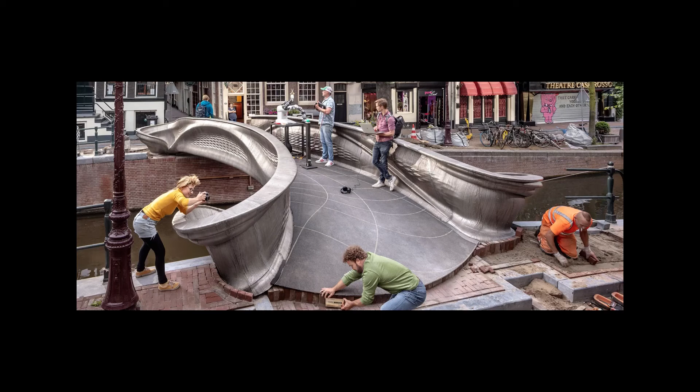So the bridge in question is called the MX3D bridge. It's in Amsterdam. I'm going to talk about our role in the project, and in particular some testing of material, components and the full bridge, and simulating it. And also what I think the future looks like to some extent in this area.

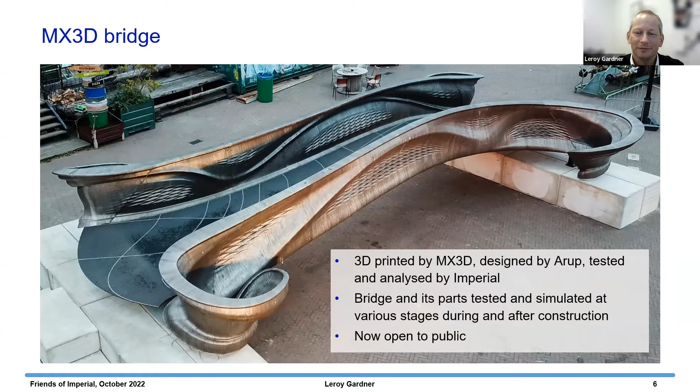So it's a footbridge, 10.5 meters span and 2.5 meters wide. There's about 4.6 tons of printed material—stainless steel—and then an additional 3 tons for the deck, finishes and end beam. These are essentially non-structural elements.

The printing took about 12 weeks in total print time, spread over a 6-month period. Printing wasn't done at full speed because there was a bit of learning and checking as the process was going on. It's a tubular structure, so all of the components are hollow, with 2 main thicknesses: 3.5 millimeters and 8 millimeters.

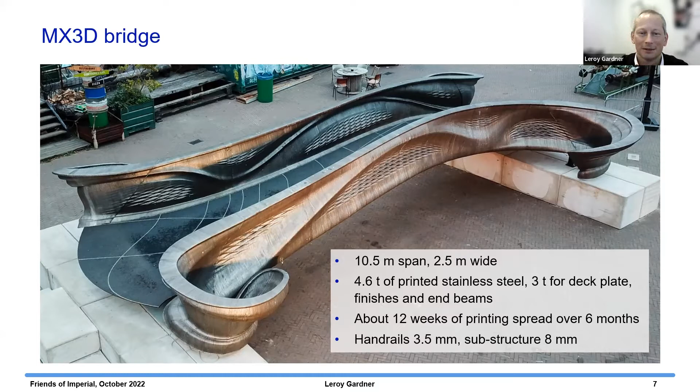The process used to print the bridge has a nice acronym called WAAM, which stands for Wire Arc Additive Manufacturing. It's basically an adapted welding process—like a welding torch controlled by a robotic arm, following the shape prescribed by a digital model. So the technology is to some extent quite familiar already to industry; we've been welding things for a long time. And the hardware, 6-axis robotic arms, are not particularly expensive, and they're used in a wide range of industries.

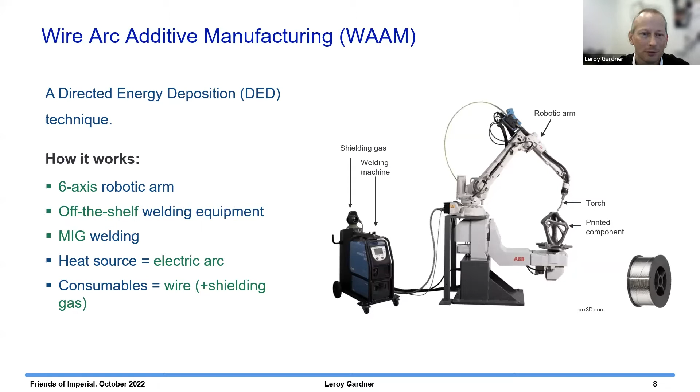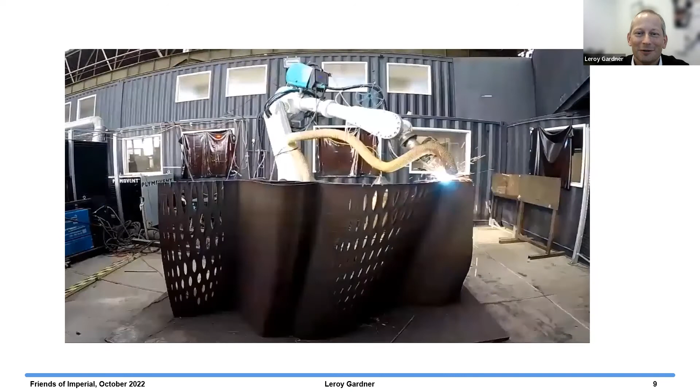The actual material used for the printing is wire—again, just standard weld wire. I've got here a short video showing an element being printed, and you can see the robot moving layer by layer, printing the structure up vertically. The bridge was built in 4 pieces, each 2.5 meters in length, and then they were manually welded together to make the full span.

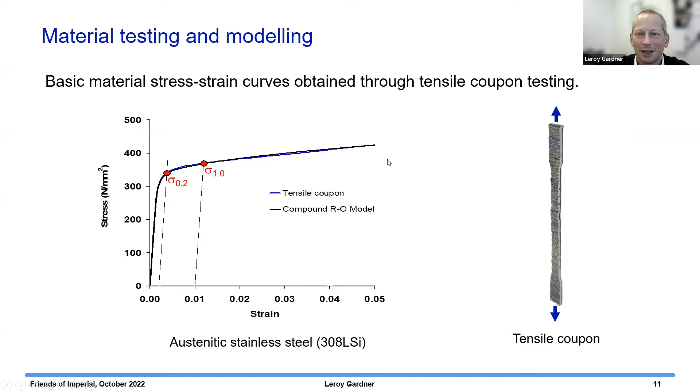So material testing: the first thing we wanted to know was the underlying mechanical characteristics of this material. You normally obtain these by doing what are called coupon tests—you can see one on the screen. We put the material in tension, get the load and extension, and convert that into a stress-strain curve. This characterizes the material response.

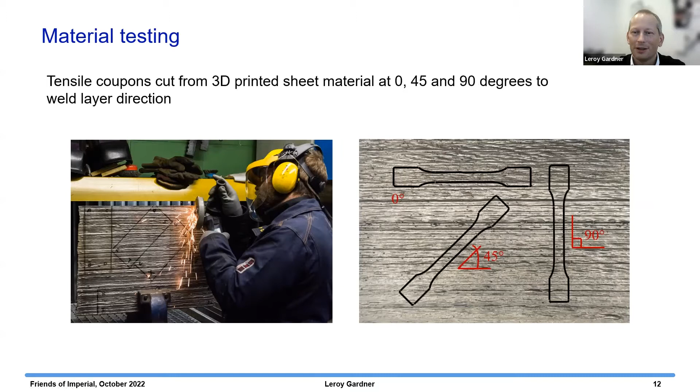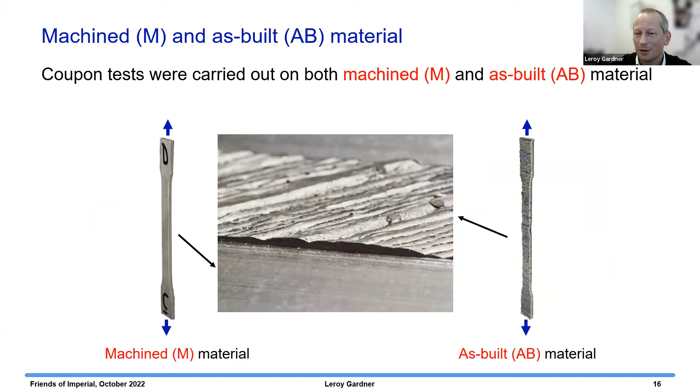Now, this is a layered material, so we thought there's likely to be an influence of direction of testing. We cut out coupons at different angles to the print layer direction. We also thought the surface finish would have an influence on behavior, so we milled down some coupons to get them flat. We conducted separate tests—some on machined material to get the underlying material characteristics, and some where the surface roughness was left in place to get the as-built characteristics. The bridge itself was not machined in any way after it was printed; it was left in the as-built state.

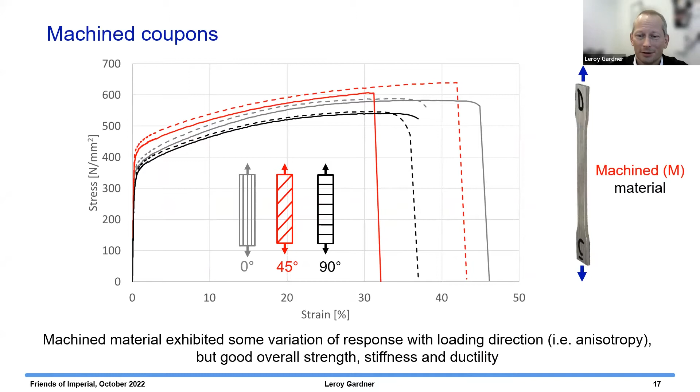So here are some typical stress-strain curves, showing results for coupons in the 0, 45 and 90 degree directions. Generally the mechanical properties were good, with some degree of anisotropy—different characteristics in different directions—but overall good strength, stiffness and ductility.

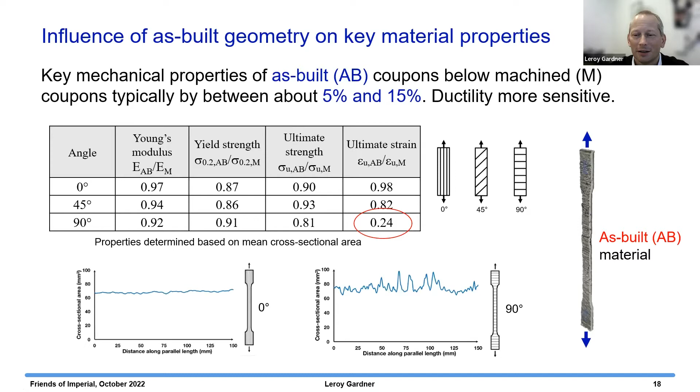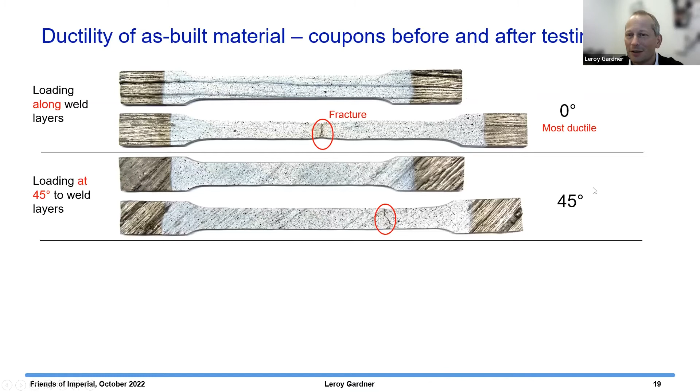45 degrees, it's a bit less ductile. And then 90 degrees, it's quite a lot less ductile. The reason for that is in the 90 degree direction, you've got your cross-sectional area going up and down, and all of the deformation tends to run into the minimum cross-section. So the strains become much more localized, and therefore you get less ductility over the full length of the coupon. So that's logical.

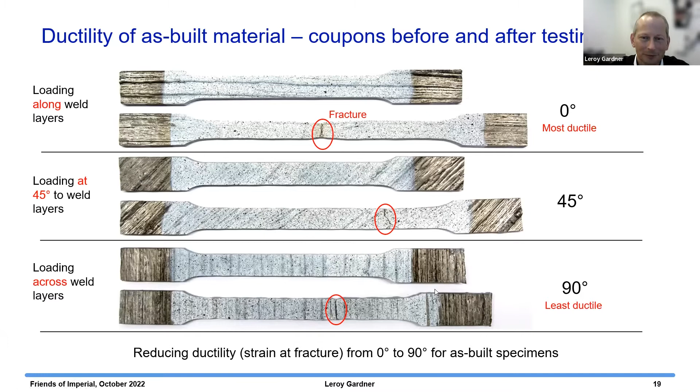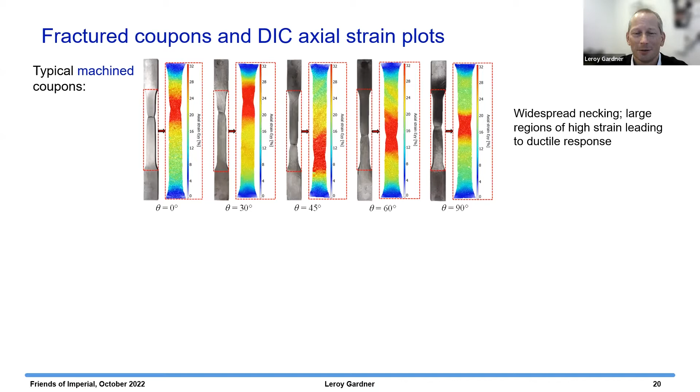But what these are showing you, the first set of diagrams here are for the machined coupons at different angles - we've got a couple of intermediate angles that we looked at as well. And the red region is the region of high strain. These red regions are quite large, and that means the high strained zones are quite widespread, and that leads to a nice ductile response. And that happened in all directions, really, for the machined material.

But when you look at the as-built material, it's still true that you've got widespread zones for the lower angles. But when you get up to 90 degrees, you can see it's very much more concentrated. All of the deformation running into that minimum cross-section, and that has a negative effect on ductility.

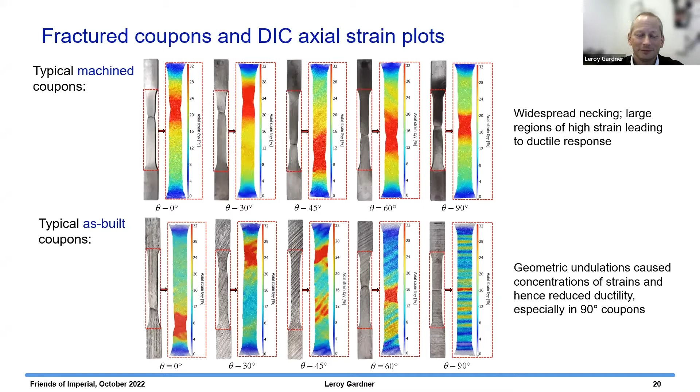And what we also found is that, as you'd expect, print quality is important, and the technology is still evolving, and print quality is getting better. Of course, the better you can print it, the lower the surface roughness, the less this sort of localization issue becomes important.

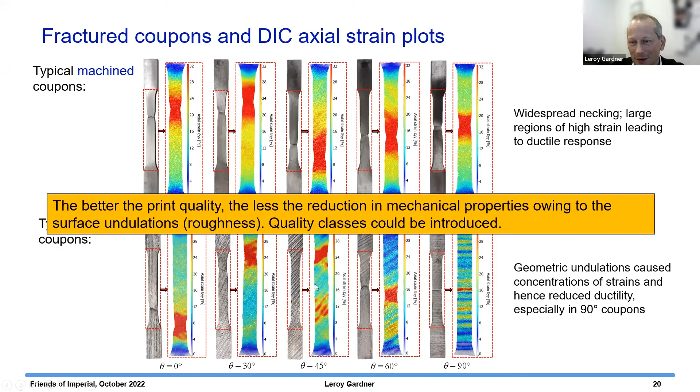Okay, so let's look at the material - so looking at some components now. We printed components of similar dimensions to some of the key parts of the bridge, and we printed regular cross sections so that we could compare their behavior to normally produced sections, and we could predict their behavior using current design codes.

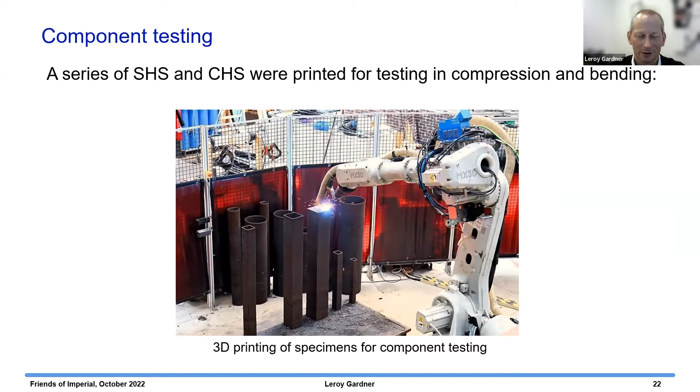A feature of this technology is that you get more geometric variability than you get with conventionally produced sections. You can see some of the surface roughness, for example, on this tube. But we really wanted to capture the geometry as accurately as we could. You can't just use a vernier, because the thickness and so on is different at all different points.

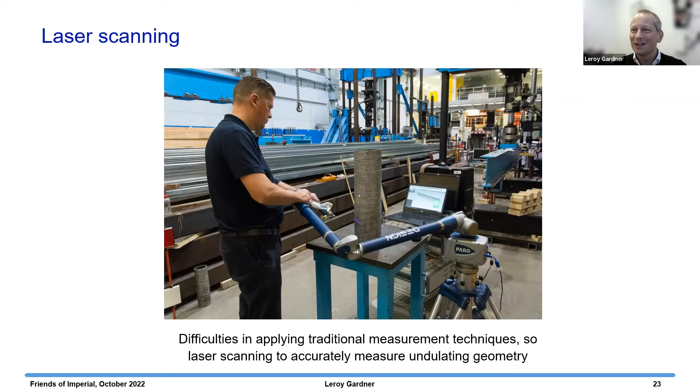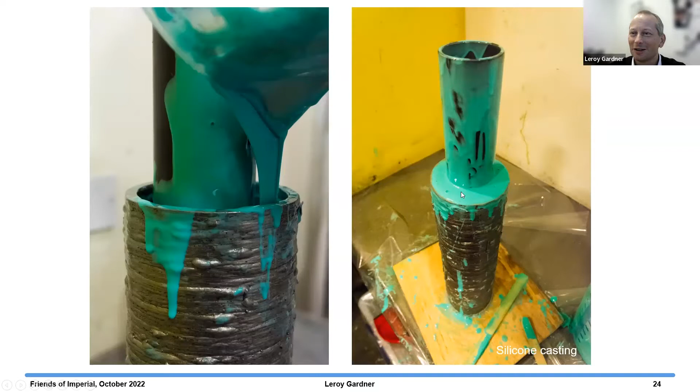So we used 3D laser scanning, and all of the sections were tubular. The problem with a tube is you can scan the outside, but it's not so easy to scan the inside. So we had the idea of trying some silicone casting of the inside - a bit messy, but we created a silicone cast, which we got a bit better at pouring it later on.

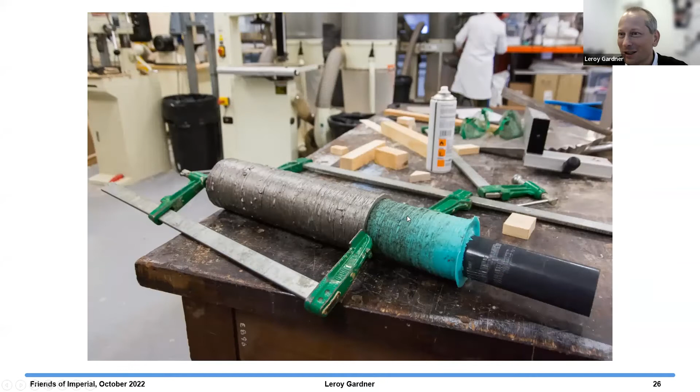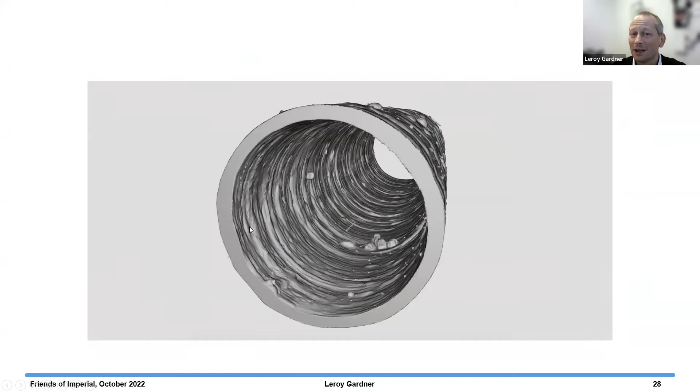And then we pulled out the silicone cast, having lubricated it and so on, and scanned the cast, and then joined the inside and outside to get a full 3D representation of the sample. At the ends of the tubes, we could actually scan both the inside and outside - it was nearer the middle that we couldn't see with the laser scanner. So we could confirm the accuracy of this idea of joining the two bits together.

And what that allows you to do is get really detailed statistical information about variation in diameter, variation in thickness. And this is important for later on when we're looking at safety, reliability, and so on.

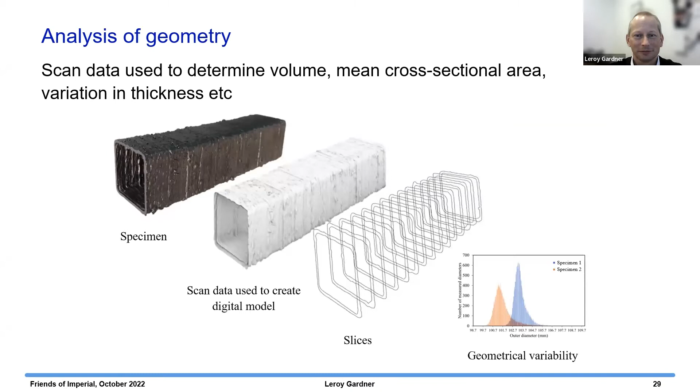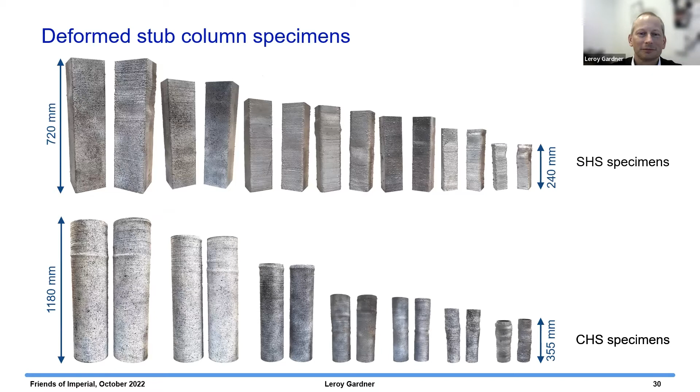So we tested a series of different geometries, different sizes, different proportions. And we typically got, so these first ones are short compression elements, and you can see the failure modes here, which is called local buckling.

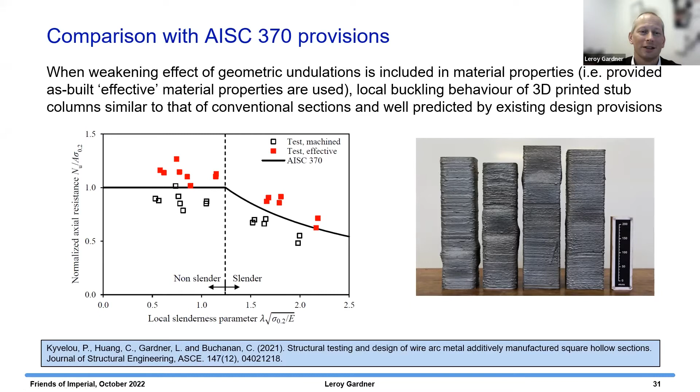And actually, they're now quite well predicted and on the safe side by existing design codes. So that was quite encouraging that these things are behaving roughly as we're used to. And provided that we take into account the detrimental effect of the surface roughness, we get reasonable predictions from existing standards.

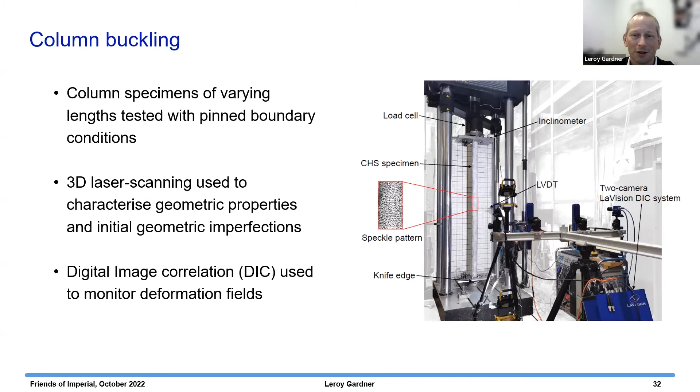And again, using the digital image correlation system, you can get detailed information about how it's buckling. And you can see this sort of localized effect as well as an overall buckle.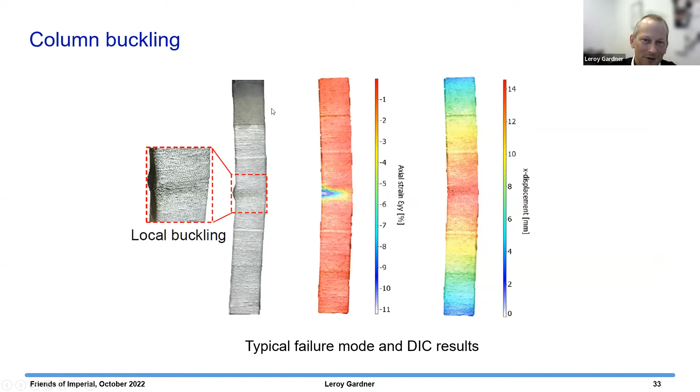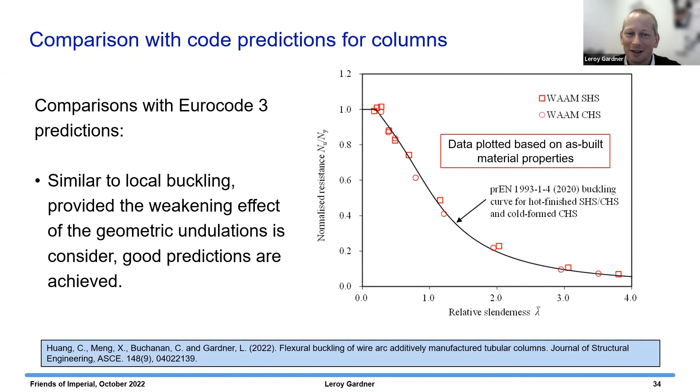Okay, moving on to the bridge. So we wanted to test the bridge during construction at various stages to make sure things were on track. And then the final bridge we wanted to test, and this was part of the safety verification and approval process. So the local authority said, we need to demonstrate that this bridge can take as much load as an equivalent normal bridge would be designed for.

So this process started at the end of 2017, and the first 2.5 meters was printed at that stage. And we had relatively crude loading equipment that we took over to Amsterdam and carried out some tests, took some measurements, and it was performing well and performing roughly as we'd anticipated from a finite element model that we'd created.

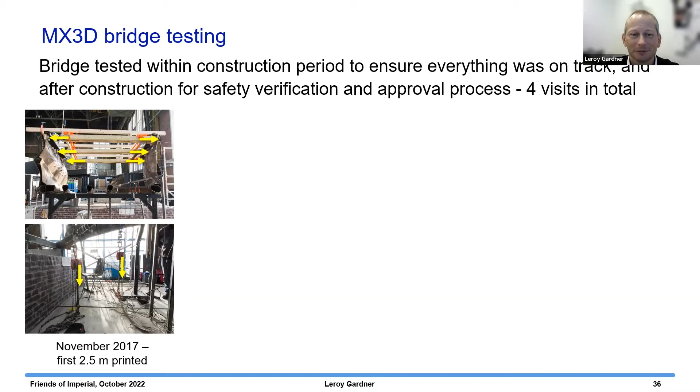We went a second time in July 2018 when the full length of the bridge had been printed, and you can actually see the substructure here, which is an interesting sort of organic shape. We went a third time when the deck plate had been put in place.

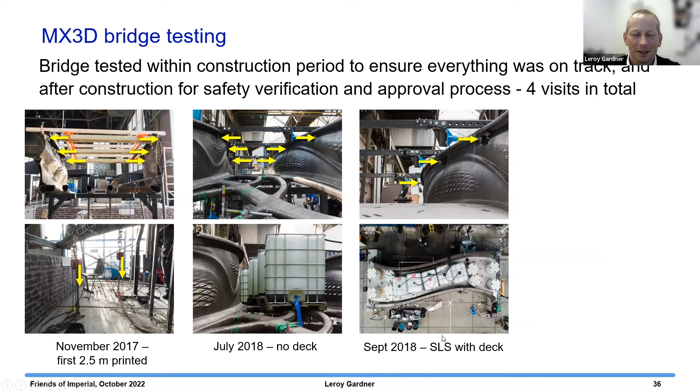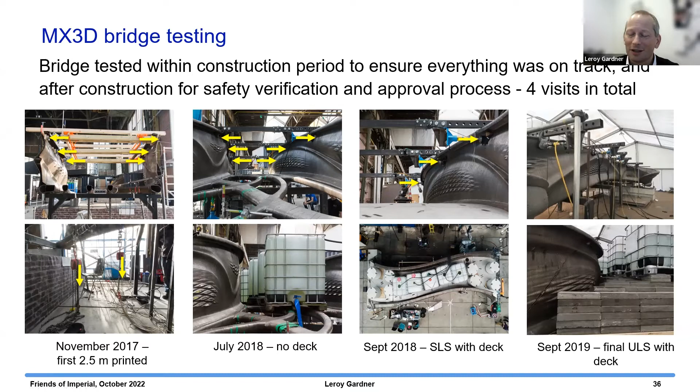And we carried out tests, what we called the serviceability tests, which enabled the bridge to be open in a temporary way, in a controlled way to the public. And then the final set of tests was in September 2019, when we applied the full design loading that the bridge would be subjected to normally, and in fact about 20% beyond that level.

So some of the photos and so on. Two basic loading scenarios we considered.

The first one was we were pushing outwards and pulling inwards on the handrails, representing crowds of people on the bridge having fun and pulling the bridge in and out. You can see some jacks here that we used to push the bridge out, and then we reversed them to pull the bridge inwards.

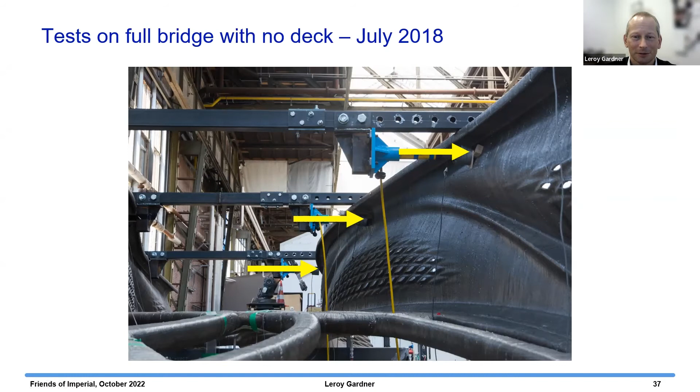The other main load case was vertical loading. In this case, we used water tanks that are 1 meter cube, so you fill them up with water, and that's about 1 ton of loading per water tank.

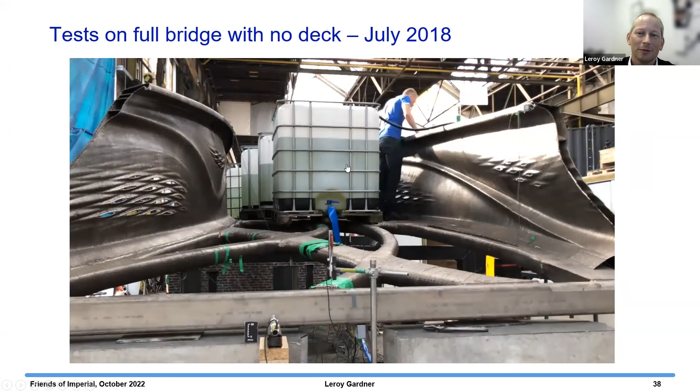You can see us filling up the tanks. We were trying to keep this relatively uniform, so we got uniform loading along the length of the bridge. I should say this was in Amsterdam, but we put an England flag on the bridge, because the World Cup was going on at the time. We were showing our support.

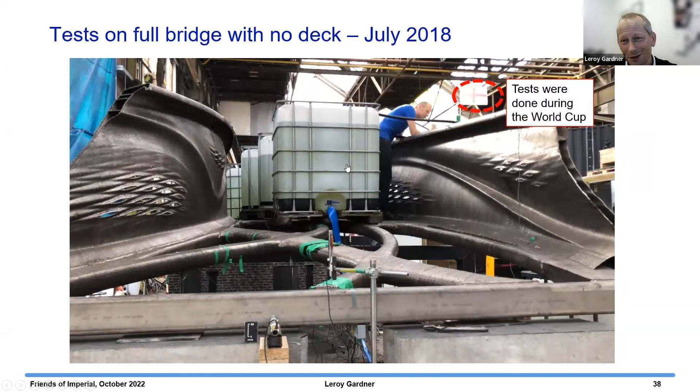The bridge deflected about 14 millimeters under the 4 tons of loading. Again, this was similar to what our FE model was predicting, so that gave us confidence again to continue.

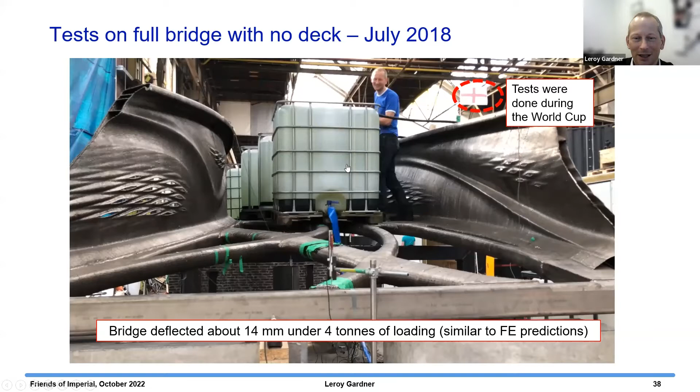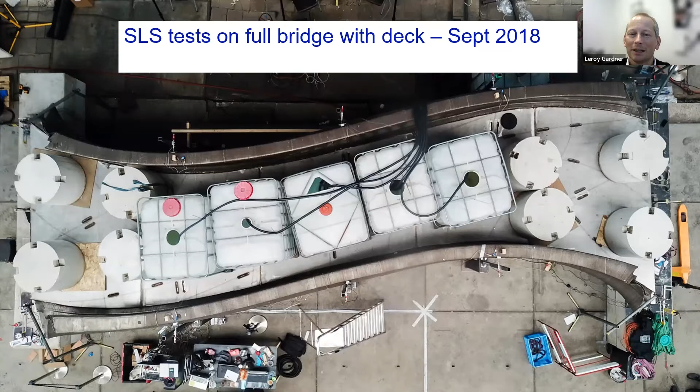Third set of tests, you can now see the deck is in place. The deck is a stainless steel plate, but this component wasn't 3D printed. This was just welded in place to the 3D printed bridge.

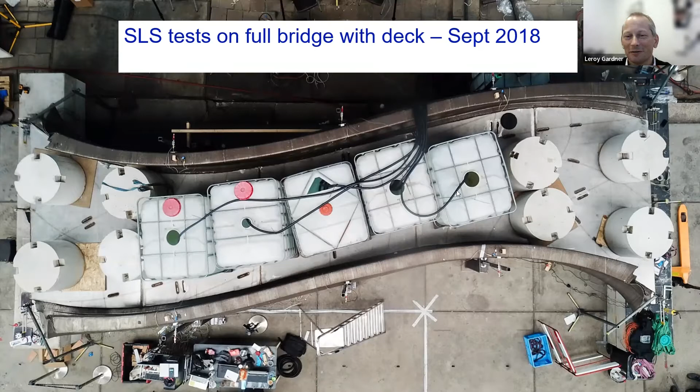The loading here comes from a combination of concrete blocks and also water tanks. The general idea with our testing is we didn't want to be physically on the bridge whilst putting high loads on it. So water tanks were quite a good way of having relatively controlled means of loading without needing to be on it.

The bridge was a bit stiffer with the deck in place, which is what you would expect. It deflected about 25 millimeters under the 10 tons of loading that we applied in this set of tests.

That set of tests enabled the bridge to be open to the public for the first time in a controlled way. The controlled way was at what's called Dutch Design Week, which is like an exhibition of innovation in the Netherlands.

People were interested in it. People were walking on it. This one group here were trying to test it to destruction. I think they started jumping up and down on it.

At one point, there was actually a bit of a cracking sound, which was a bit concerning, or very concerning. But in fact, it was one of this group who had dropped their bag onto the metal deck. So it sounded a little bit bad, but in fact, was no problem.

At least they weren't going to fall in the water. Well, exactly. They couldn't fall too far in this case.

So then the final set of tests was what you can see on the slides here. Loading came now from a combination of a lot of individual paving slabs, effectively loaded up, and roughly 2.5 tons per layer of these blocks, and 6 layers, and then water tanks on top of that.

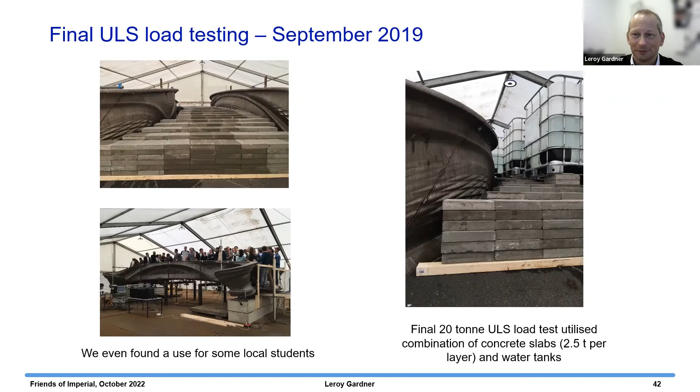Of course, we've got a lot of data now from this bridge, which we've analyzed to try and understand how the bridge performs and ultimately make sure that we're confident that it was safe. And we were able to do that.

We had a finite element model being developed in parallel with the construction of the bridge. We validated it on a continuous basis. We were learning more about the bridge and its materials throughout the process, so we were constantly improving the model.

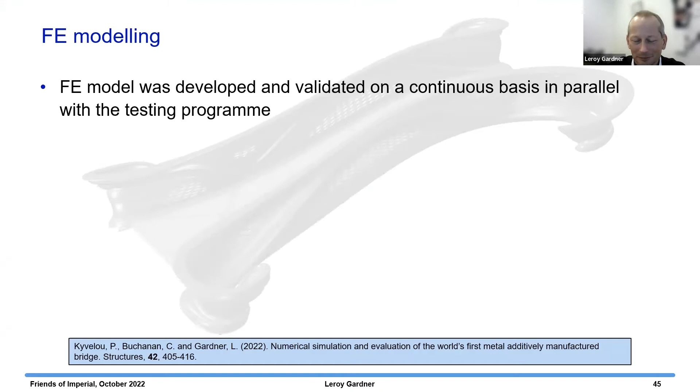We used measured material properties and a finite element software called Abaqus. There are close to 1 million shell elements, which is quite a big finite element model but still manageable to run. We carried out geometrically and materially non-linear analyses, which are the closest to replicating reality. The model allowed us to look at more load cases than we could through physical testing alone.

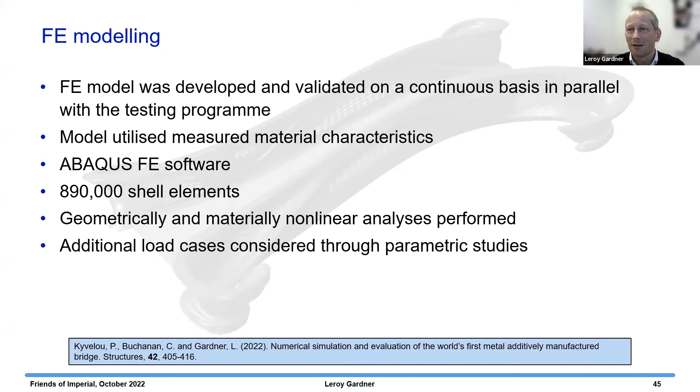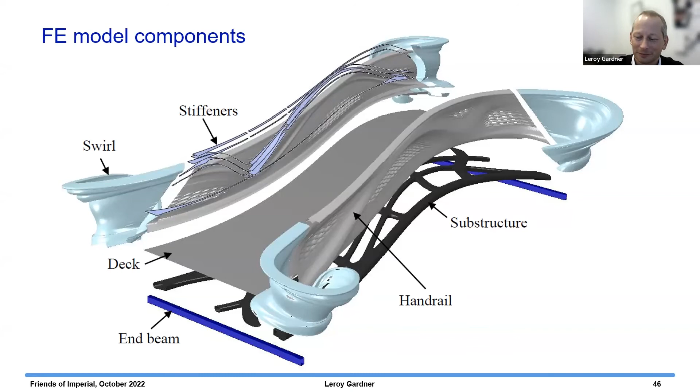Here you can see the components of the model. The basis of the geometry of the model was the same digital model used to print the bridge. We also did laser scanning of the bridge to see how close its geometry was to what it should have been, and it was very close. Here are some details of the elements of the model and the mesh.

We wanted to validate the model to demonstrate that it could actually replicate the observed structural response. This is one example, one of the horizontal loading cases, with load on the vertical axis and deflection on the horizontal axis. The test and FE curves are in pretty close agreement, showing that we're able to capture the behavior quite well.

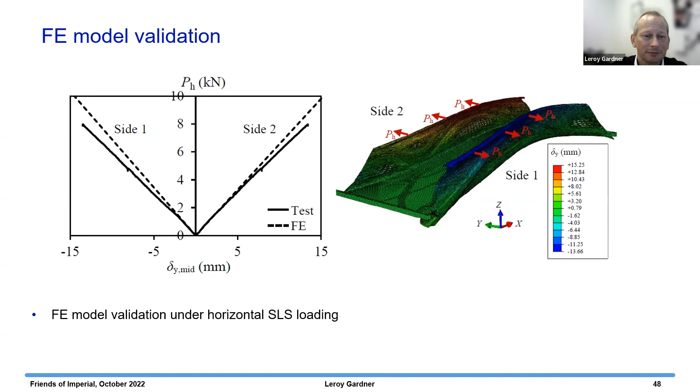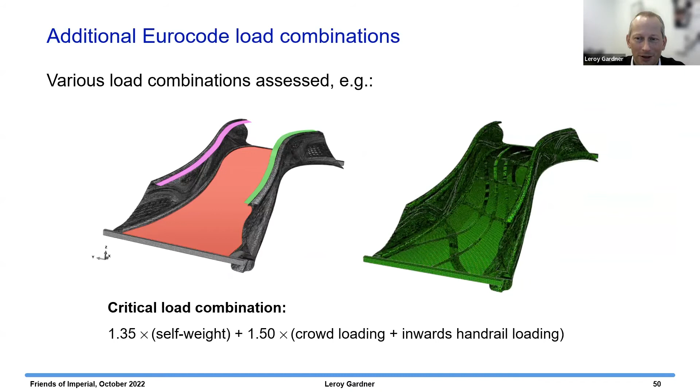Once we had validated the model and shown it could replicate reality quite well, we could look at different load combinations. We found that the critical load combination was when we had the maximum vertical load, mainly from pedestrian traffic, combined with the maximum horizontal load simulating people pulling in on the handrails. That gave the lowest resistance, but showed we had a good margin of safety against failure.

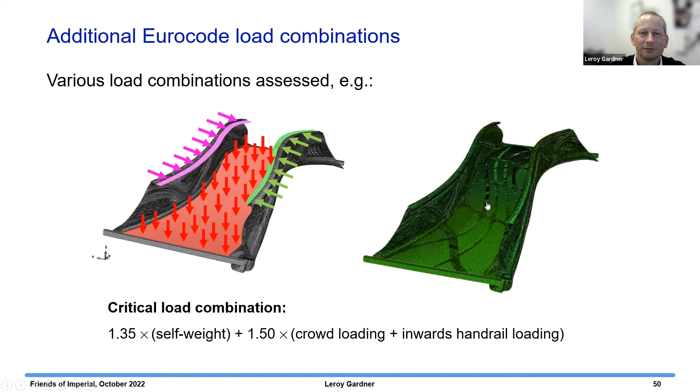The bridge was taken by barge from the factory and put into place, craned into place over a canal in Amsterdam. That happened in July last year. The bridge was opened by the Queen of the Netherlands, and there was a bit of a celebration.

The bridge is still there, which is good to know. It's been there for over a year now, and it's being continuously monitored during its life to see how it behaves. It's currently got a relatively short design life, only 3 years, set because we don't know much about its behavior yet. Many structures have quite a short design life to start with, which later gets extended, subject to the behavior being shown to be okay. So we'll see how that develops.

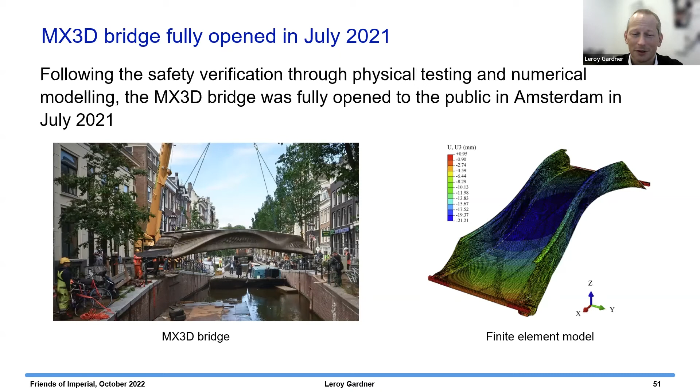Just a word on some general aspects, challenges, and what might be next. A big challenge for construction is cost. With 3D printing, you often think cost is going to be a problem, but actually this particular technology is relatively low cost. The hardware is a robotic arm and a welding torch, and the input material is weld wire, so it's not particularly expensive.

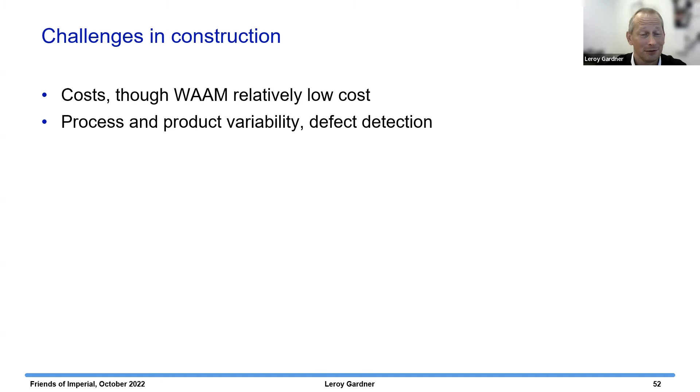Product and process variability, defects and so on are a challenge. Normally when you produce a steel section, it comes from a major supplier with quality control processes and certification in place. With metal 3D printing, you can have a fairly small operation, which is likely to mean there's less scrutiny and quality control. This is something we need to think about for more widespread use. We've got well-established standards and statistics for normal steel, and this is needed for 3D printed steel too.

One of the biggest advantages of 3D printing is you can really put the material where you want it and where you need it. But that also means you've got more complicated geometries, which makes it more challenging from a design point of view.

Ultimately, we need to make sure that structures or parts of structures built in this way are safe. I suppose with all of our work on 3D printing, that's what it all boils down to. We're looking at the opportunities, but we're thinking how this can be safely implemented in a widespread manner, but in a safe manner in practice.

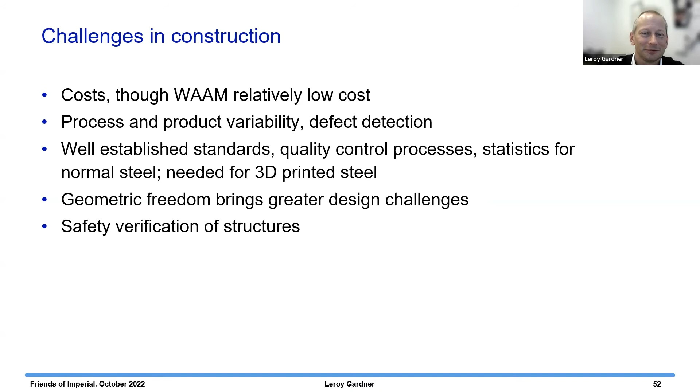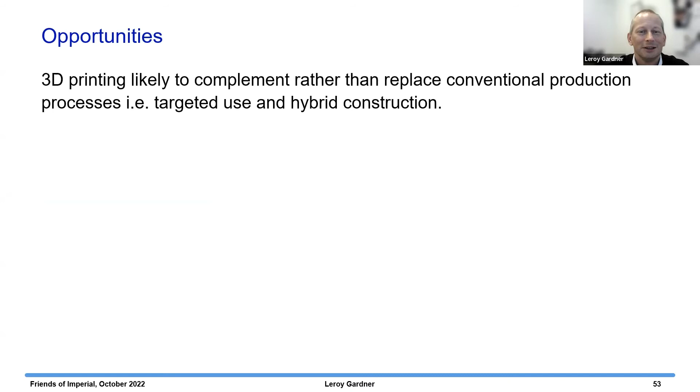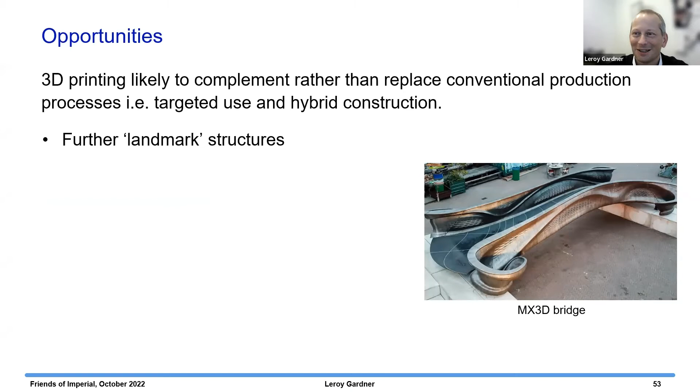Future opportunities: I think this method of construction is going to complement rather than replace conventional construction processes. So targeted use, hybrid construction. There's likely to be further landmark structures. This technology can produce fairly unique offerings which will be attractive. There's potential for wide use in structural details, things like connections and stiffeners.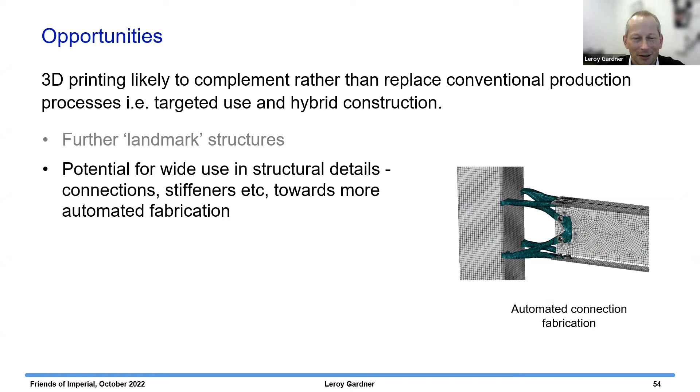When you have buildings, you need to join beams and columns. There's thousands and thousands of these types of connections around. 3D printing can potentially offer a more automated method of construction here, and this is really quite manual at the moment.

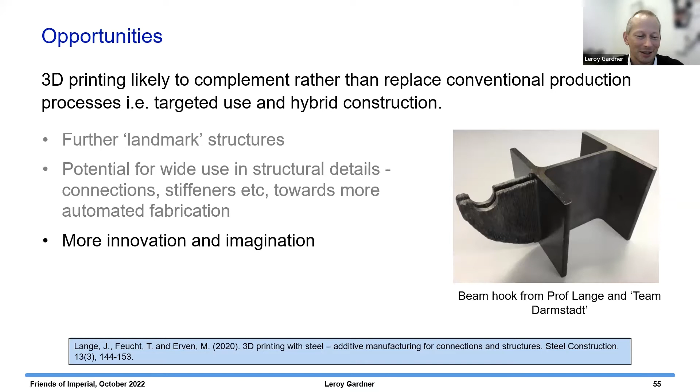I think there's scope for a bit more innovation and imagination. There's a group in Germany that have developed what they call a beam hook. It's quite a simple idea. I think one of the limitations is really our imagination now, rather than what the technology can do. We need to think about how we can use this geometric freedom to produce shapes that are optimal, but also functional.

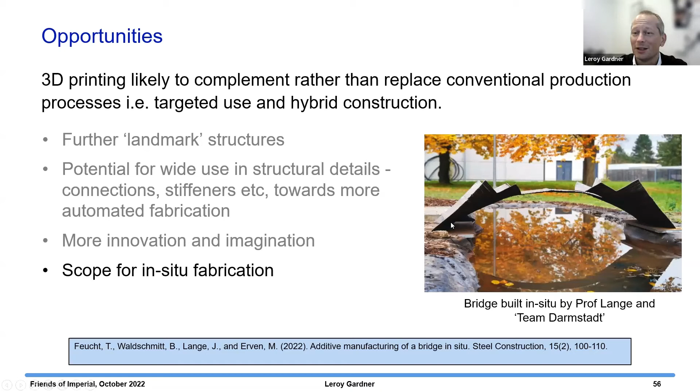There's potential for in situ fabrication. So rather than having your structure fabricated in a fabrication shop and then transported to site, potentially it could be printed directly on site with a team of robots. This small bridge over a stream was produced on site in Darmstadt, Germany.

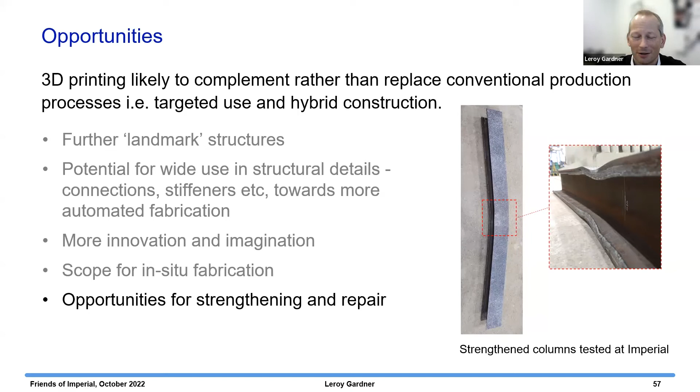This could be for both existing structures and new structures. You could have a few layers of weld added to all columns and get that 20-25% extra strength without much more material.

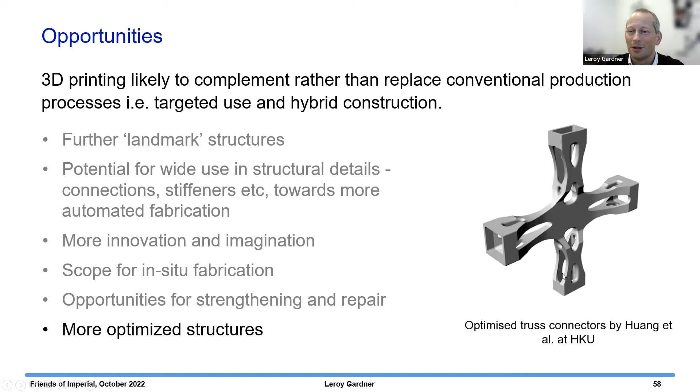There's certainly scope for more optimized structures. This kind of shape is completely impractical to produce using normal manufacturing techniques, but using 3D printing, especially at a construction scale, it's as easy to produce this sort of shape as it is just a solid block. So there's huge scope for optimization, I think. Various groups have started looking at this, and here's an example of some optimized trusses that have been produced as well.

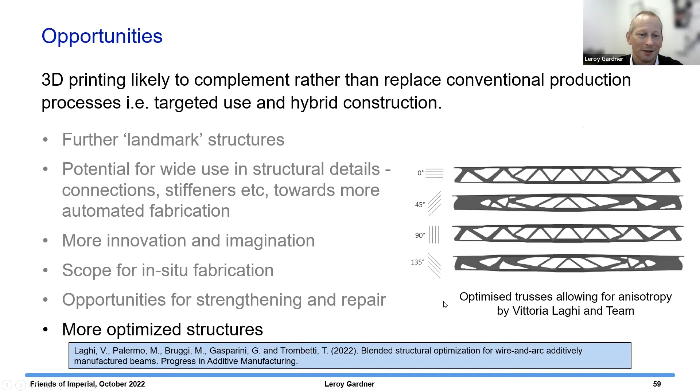A few conclusions: this additive manufacturing process, WAAM, wire arc additive manufacturing, I think is the most suitable metal 3D printing method for construction. There are other different ones, but with a balance of cost, speed, and scale, this one is good. We've got some promising results at the material and member level, showing that it performs reliably.

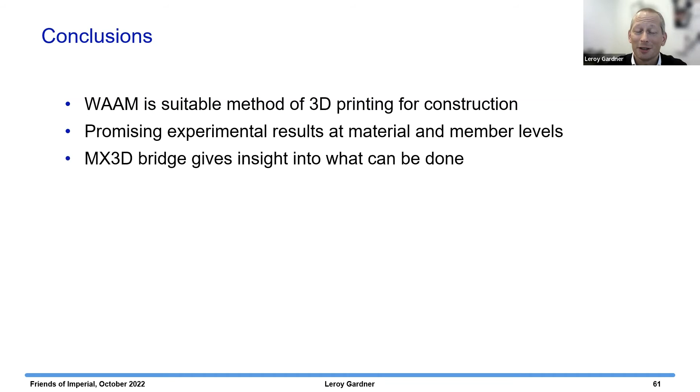The MX3D bridge is a great visual example of what can be done, and it's now passed its safety verifications. It's open to the public. I think optimization and additive manufacturing go hand in hand, and this is a really important part of the viability of the technology. You shouldn't just be printing I-sections - we can already produce those very efficiently. We should be making use of the geometric freedom to print more optimized shapes.

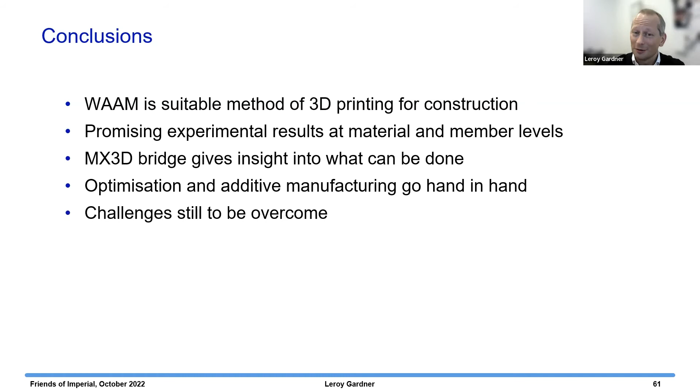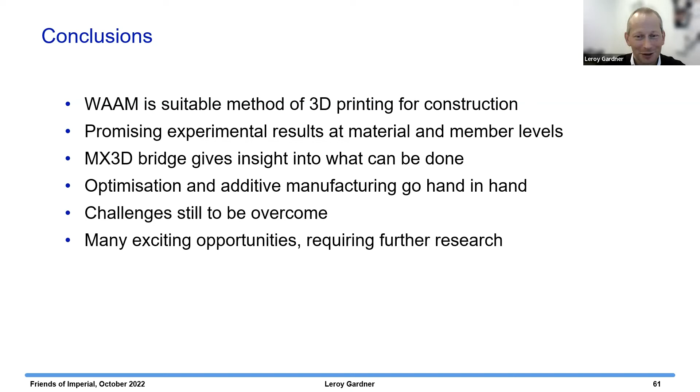There's definitely still some challenges to overcome before this can be used very widespread, and lots of exciting opportunities requiring further research, which are going to keep me amused for some time to come, I'm sure. And with that, I'd like to finish and welcome any questions. Thank you very much indeed.

I'd like to begin - there's some questions coming up, but I'd just like to ask a little bit of history. What prompted the bridge? Who came up with the idea? Did they go to Arup and Arup said, 'Oh, we want to print a bridge,' or did the client say, 'We want a printed bridge'?

How did that take place? It's the company MX3D, a relatively small operation, and they started working on this technology, producing mainly sculptural things and furniture, tables, this kind of thing, with unusual designs for people to buy. And they were very popular. They then thought, well, what else can we do with this technology? They printed small structural things and showed that they behaved okay. And they approached the local authority and said, would we be able to print something for the city of Amsterdam? They got lots of help in place, and there are various partners involved, and it started to become a reality from that point. But what became apparent is that they didn't know too much about structures. They knew a lot about printing, and that's where Arup came in, and then we came in, and we learned a huge amount during the process.